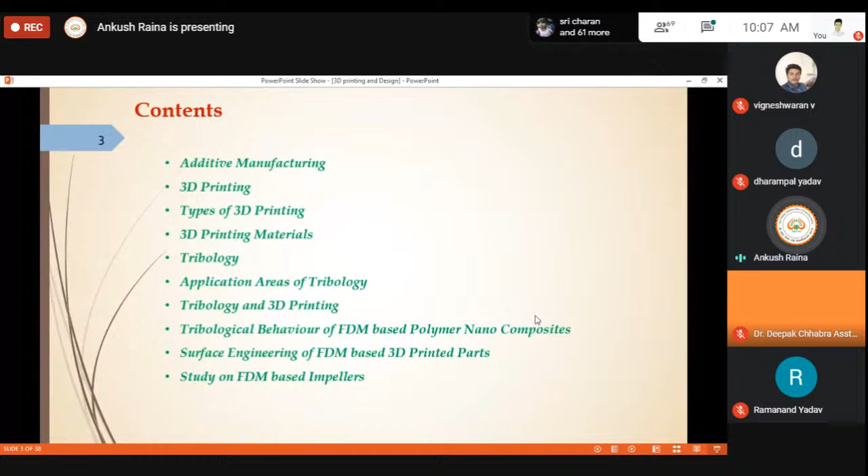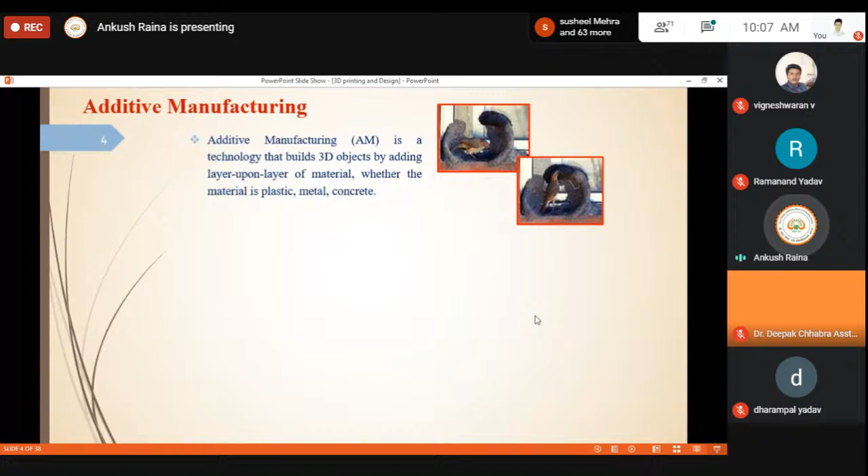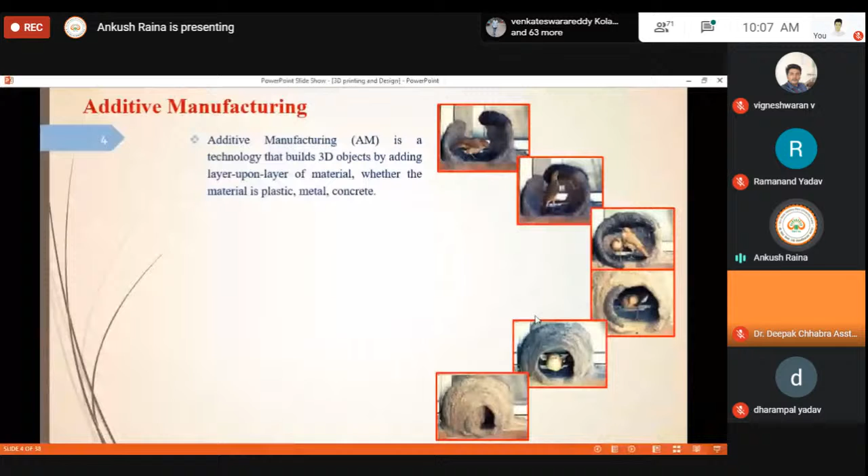So talking about additive manufacturing, nature has given us so many lessons, and from nature we have learned additive manufacturing also. Here from the images you can see how the nest is being built up by the birds, layer by layer. Similarly, another example is the potter wasp, which builds up its nest again layer by layer. So we can say it is additive manufacturing, a technology used to build objects by adding layers, whether plastic, metal, or concrete. You can use different materials with this technology to additively manufacture the components required.

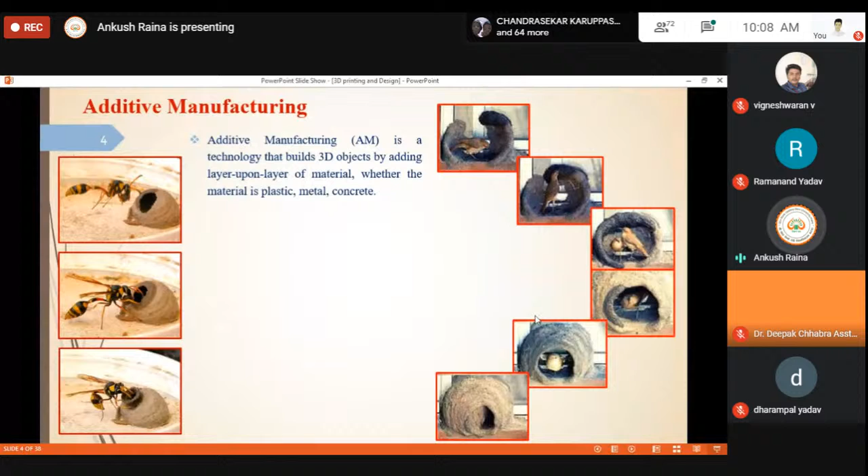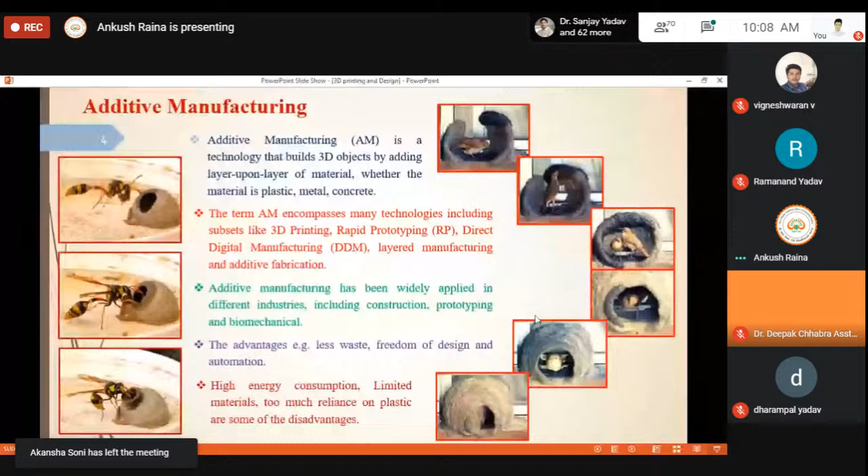So basically, additive manufacturing comprises different aspects such as rapid prototyping, digital manufacturing, layered manufacturing, additive fabrication, and most importantly 3D printing. It has different applications which we'll discuss in the coming slides, some advantages, and certainly some limitations of this technology. So first of all, the difference between additive and subtractive manufacturing is quite basic. Additive manufacturing, or AM, is suitably named to describe the technology used to build 3D objects by adding materials layer by layer.

The term additive basically is used to denote over here that we are using a method of adding and building up the product repeatedly. So, in comparison to additive manufacturing, if we talk about

subtractive manufacturing, it is an opposite method of additive manufacturing. It manufactures the objects basically by subtracting, by using different machining operations. It can be milling, it can be drilling, or it can be any other cutting operation. It is also called traditional manufacturing, which basically we are aware of, and is used by means of

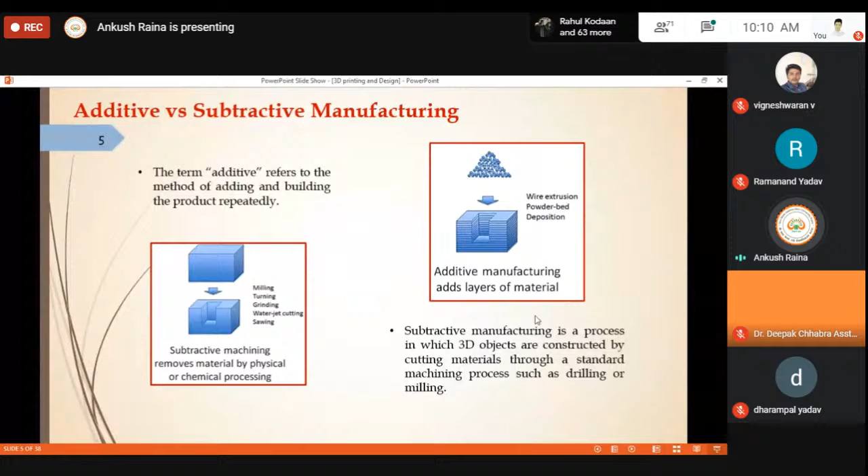your CNC machining. So additive manufacturing is to add something, and subtractive manufacturing is to subtract material from the already manufactured component. So why is it important to discuss additive manufacturing, why does this method have advantages over subtractive manufacturing? The first figure here you can see is that we can manufacture materials with different properties.

So you can see that the topmost layer of this image is 90% ceramic and 10% bond coat, and certainly you can functionalize the material as per your choice by using different coatings and different layers of different materials. So we can generate some functional materials as per our requirement. You can see the bone over here.

You might be aware that the strength of the bone at the central part is more in comparison to the joints, whereas at the joints the porosity is more. So if you want to replicate some sort of bone-like structure, the material should be selected, designed, or manufactured in such a way that it gives similar properties as the human bone or any other bone gives. So additive manufacturing basically helps us to design or fabricate such kinds of structures.

So the most important aspect is part complexity. We can produce parts with a complex nature, which are not easily possible with the other or conventional methods. Secondly, speed is also an important aspect of additive manufacturing. Also, we have the choice of material selection. We can select the materials based upon the applications, but there are limitations that we will be discussing regarding material selection in the coming slides.

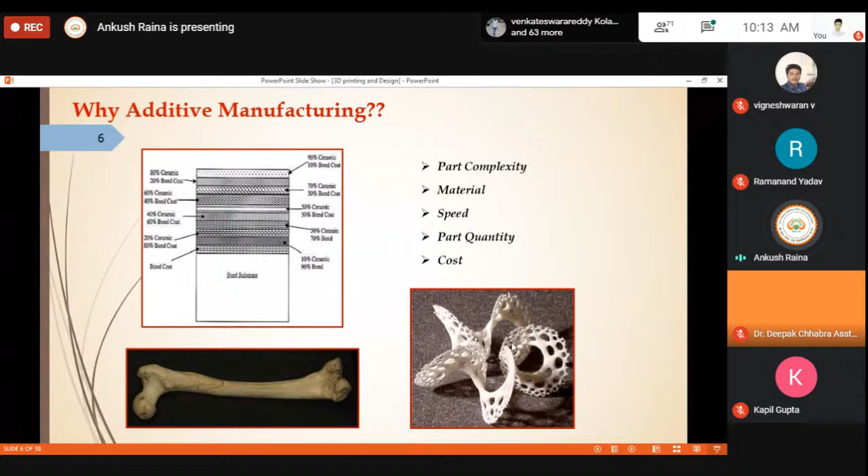So talking about 3D printing, the basic definition. Despite 3D printing being nearly synonymous with rapid prototyping, there are scenarios where it's a viable production process. Typically, 3D printing is used in different sectors, which include transportation, healthcare, military, and education.

And these applications basically involve low volumes and complex geometries, as discussed in the previous slide, that we can produce geometries which are complex in nature very easily in comparison to other conventional processes. Often the most important applications nowadays are aerospace and medical applications, and there is a wide variety of applications in the aerospace industry and in medicine.

And the materials used in 3D printing include resins, plastics, and in some cases metals also. So here you can also see that in 3D printing, 25% of the contribution is for prototyping, 16% is for product development, 11% is for innovation and design, 9% is for reduction of cost, and 10% is increasing the overall efficiency of your systems.

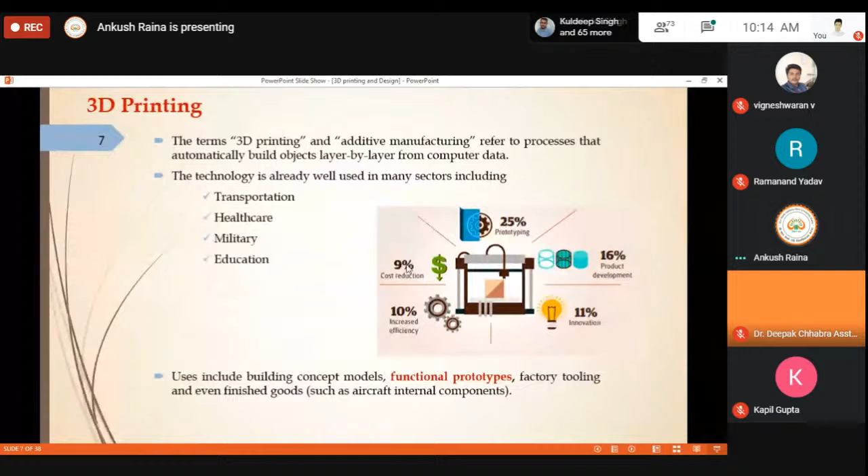So again, it is used to build concept models, functional prototypes, factory tooling, and even finished goods. So before we move ahead, it is important to understand what a prototype is. So we have different types of prototypes which are basically used.

The first one is a design prototype. Secondly, we have a geometric prototype, then functional prototype, then technical prototype, and industrial prototyping. So talking about the design prototype, I'll quickly go through that.

This type of a prototype is constructed to test whether the realized object meets the optical requirements or fits to the overall concept, whether there is any clearance, or whether there is any other tolerance. So we basically use this design prototype to find out that. So basically these models have no functionality and can only be manufactured of standard plastics. So these are just used to meet the design requirements.

Then geometrical prototype is the one which has the exact dimensions of the application and can be installed to see whether other modifications are required or not, whether a change in the dimensions of your prototype is required or not. So this is basically a geometric prototype.

Then coming towards the functional prototype, which is an important prototype, it basically maps the functionalities of the planned component and can be tested directly in the application. So for these, it is always recommended that a small series of sample parts be manufactured, so that they can be tested under various conditions. So basically, this functional prototype is the main or the backbone of all these prototypes.

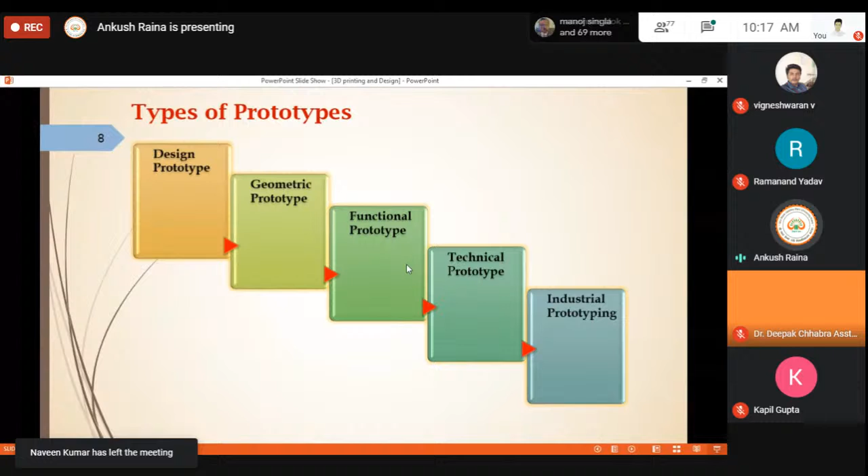So these are the different types of prototypes which are important when we talk about 3D printing technology. So these are basically the 3D printing techniques. Again, this is a basic part which might have already been covered, so I will quickly go through all these points. So these are the different 3D printing techniques which we use, right from stereolithography to electron beam melting. So I'll quickly talk about all these.

Stereolithography is an original industrial 3D printing process, also denoted by SLA. SLA printers produce parts with a high level of detail, smooth surface finish, and exact tolerances. It's widely used in the medical industry, and common applications include anatomical models and microfluidics.

Then coming towards selective laser sintering, SLS. In this, nylon based powders are melted into solid plastics, and since the SLS parts are made from thermoplastic materials, they are durable, suitable for functional testing, and can support living hinges and snap fits. So in comparison to the previous process, the parts are stronger and have rougher surface finishes.

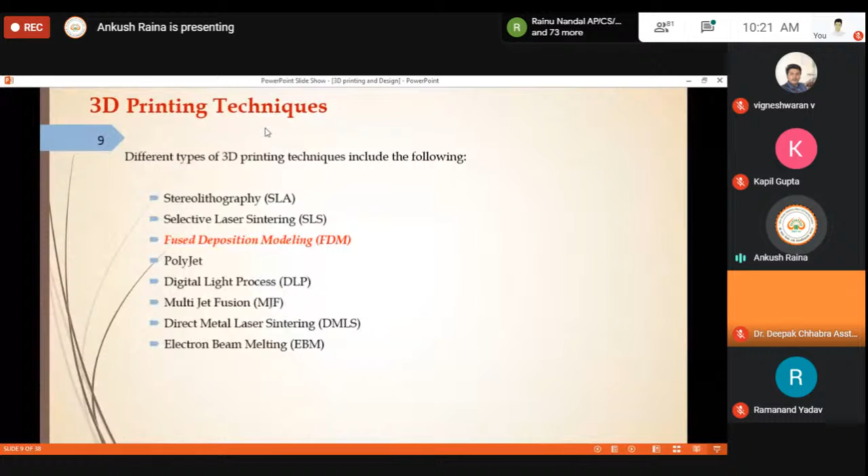These are basic techniques. So coming towards the FDM, because a lot of work has been done by using this technology and this technique, and we have also performed the studies using this technology only, FDM technology. So in that case, a continuous filament of thermoplastic polymer is used to 3D print the layers of the materials. The filament basically is heated at the nozzle to reach a semi-liquid state, and then extruded on the platform or on the top of the previously printed layer.

So the thermoplasticity of this polymer filament is the important property in this method, which allows the filaments to fuse together, because a fusion of the filaments is an important aspect, because it governs the various properties and the various characteristics of the finished product.

The layer thickness, the width, and the orientation of the filaments, and the air gaps basically are the main processing parameters, as I told you, because these will affect the different properties of the 3D printed parts. So the low cost and high speed and simplicity of the process are the main benefits. That's why the FDM is widely used in printing polymer parts.

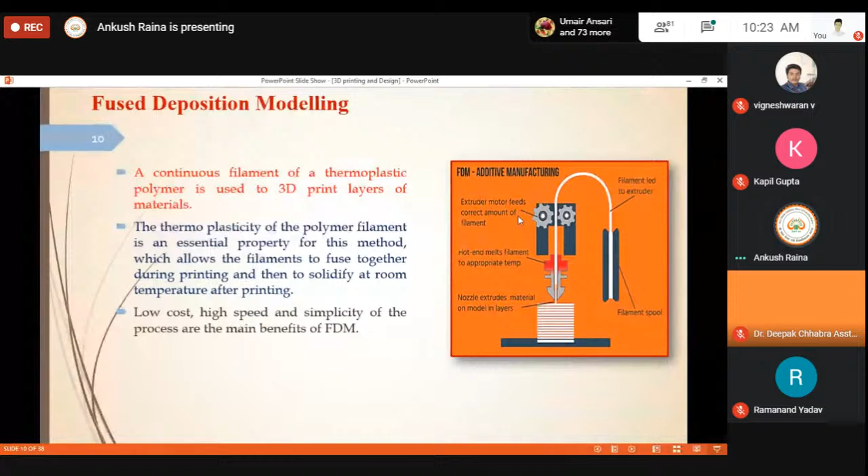But these are the wide variety of materials which are being used. But I can say that there is a lot of work which is further required to be done in order to explore all these properties and all these functionalities of all these materials.

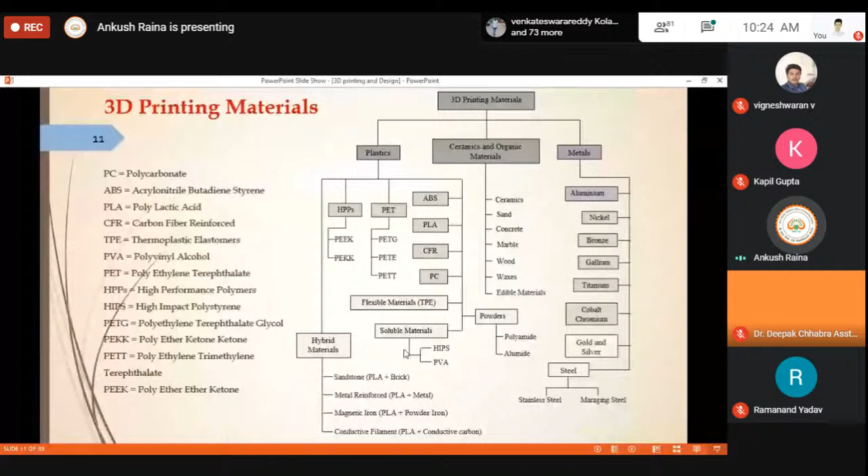So coming towards the challenges and shortcomings of this technology. Challenges: the most important is your fiber orientation, because fiber orientation plays an important role in governing the properties of these different materials, which is the final product. So there is a challenge to find out what kind of fiber orientation will give us the best results. So again, it is a challenge, but a challenge can always be met if you look into that from different perspectives.

And then if you come towards the next challenge, that is your bonding between the fiber and the matrix. As I told you, the temperature plays an important role. If the bonding between the fiber and the matrix is good, certainly the properties of the finished product will be good. So again, it is a challenge to produce a finished product with good bonding. Then void formation, again, it is there, which is again a challenge.

Then cost of the system equipment, because you know that we have different 3D printing technologies, and we have different techniques for this 3D printing. So each and every technique has its constraints. So it's again a challenge to look into the cost of the equipment which is being used to print these parts.

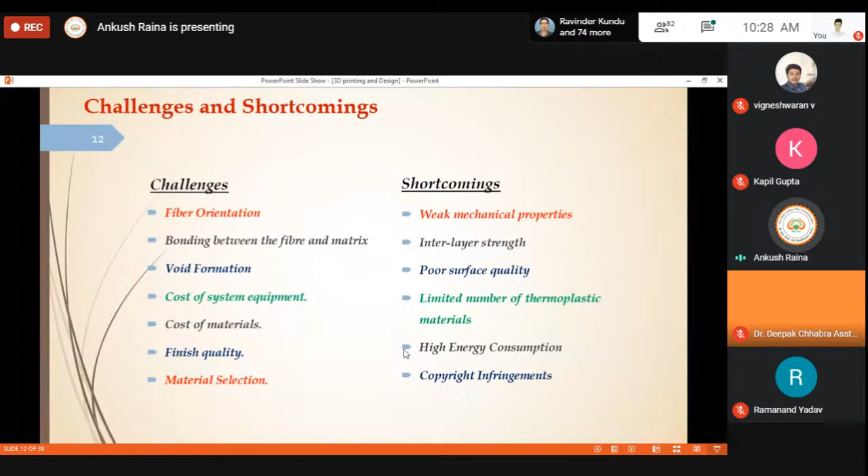So the considerations, when we go for 3D printing or when we go for the conventional processes of material fabrication. The basic factors which should be considered while selecting the 3D printing process are the budget requirements.

This is your functional requirement, cosmetic appearance; obviously the shape or the aesthetic looks of the material should be met. Then geometry is an important aspect, and again material selection, which is an important aspect, because material selection plays an important role regarding the applicability of your products.

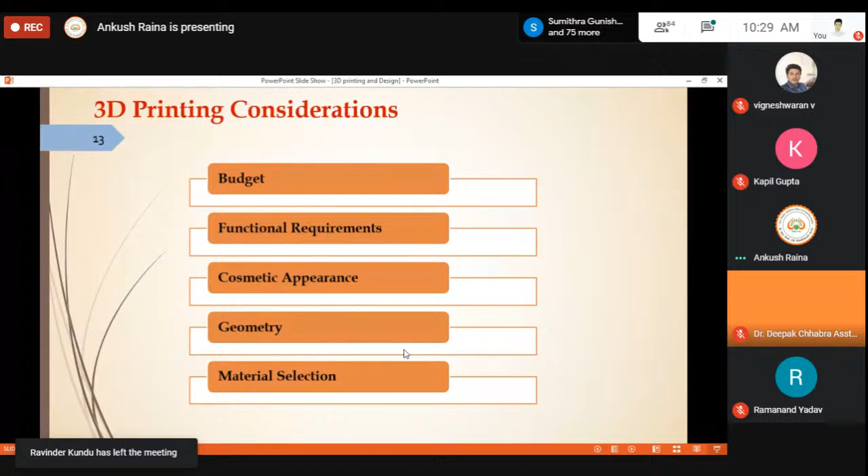So coming towards the next slide. These were the basics regarding 3D printing, which you are aware of, and which might have been discussed in the previous talk by Dr. Abid Ali. But this is tribology, which is something new in this course.

So tribology was first reported by Peter Jost. It is a science concerned with friction, wear, and lubrication mechanisms. Since you are all from the mechanical background, you might be aware of this term tribology. The performance, reliability, and efficiency of the system basically depend upon the friction and wear characteristics of a particular component.

So the widespread involvement of wear and friction: you know that friction is everywhere, and in order to overcome the friction, there is always a wastage of energy, and material wastage is always there. So friction and wear are an important aspect when you talk about tribology. Whenever you talk about the motion of components or sliding surfaces, the goal of the tribologists is always to reduce those energy losses by bringing improvements in different aspects.

There are reports which have projected that if we use best tribological practices, we can save the GDP or GNP, gross national product, of an industrialized nation by 1 to 1.4%. That will contribute to the economy and give a boost to the economy. But the use of the best tribological practices is required.

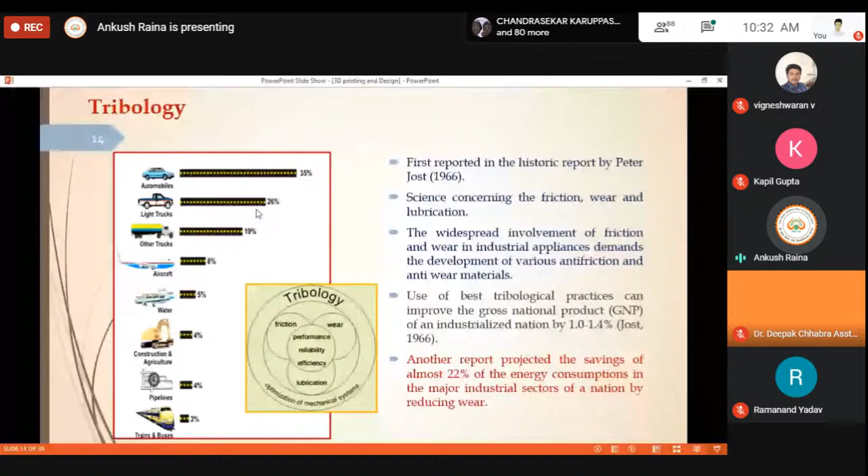If we look into the performance of the components which are used in automobiles, light trucks, and other trucks from the tribological point of view, surely we can reduce the energy waste, or improve the savings, and certainly it will help to improve the economy of a particular nation. So tribology deals with friction, wear, and lubrication in order to improve the performance, reliability, and efficiency of mechanical components. So there are different application areas of tribology.

So first, when tribology was introduced: although friction is a term which has been used for ages, the concept and the term of tribology was coined in 1966, which encompasses friction, wear, and lubrication. So when it was started, this term was coined.

Peter Jost was talking about industrial tribology only, because most of the frictional and wear losses are due to the industries, different mechanical components, different machines. So industrial tribology was, first of all, coined in 1966. But with the passage of time, ocean tribology was coined. Then manufacturing tribology was segregated therefrom.

Then we came to know about the important aspect, that is biotribology, because in biological systems there is also some tribology, some friction, wear, and lubrication mechanisms. Ocean tribology involves the investigation of friction and wear in a seawater environment. Seawater is very corrosive in nature, and it results in an increase in the surface roughness.

And if the surface roughness is increasing, when the components slide there will be a lot of wear and a lot of friction. Because if the surface is rough in comparison to a smooth surface, your energy requirements will be more, whether in sliding or rolling applications. So in ocean tribology, the corrosive nature of the seawater tries to increase the surface roughness.

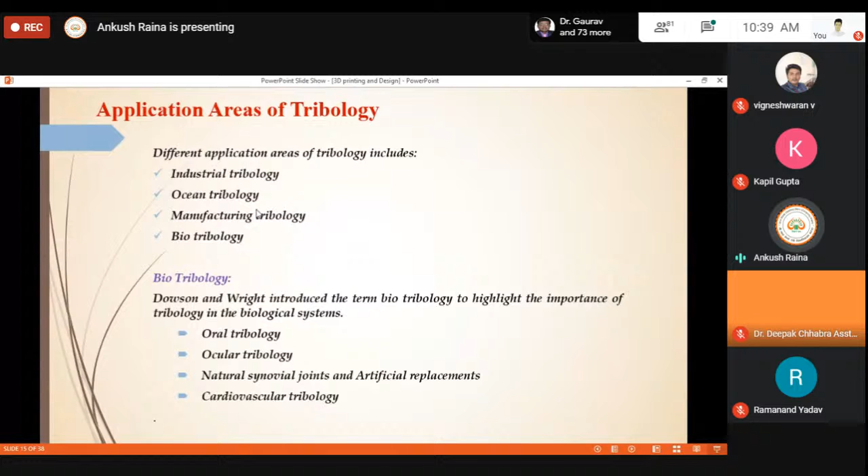Coming to the types of wear, I will quickly go through these aspects. First is adhesive wear. Adhesive wear is when two material surfaces or metal surfaces are in contact or in sliding contact, the metal of the softer surface will be transferred to the other material, and this is due to the mutual affinity between the materials. It will be more when the loads are high and the temperatures and pressures are high, because there will be asperity to asperity contact.

What we call an asperity: if we consider a surface profile, you will see there are peaks and there are valleys. The peaks are called asperities. Those peaks will come in contact with the other surface, they will be damaged and transferred to the other material. So that is called adhesive wear.

Similarly, we have abrasive wear. Abrasive wear is somewhat different from adhesive wear. In case of abrasive wear, there will always be abrasion or a cutting action. What happens is that the hard particle rolls under the pressure and tries to scratch the surface away. I'll show some images about this adhesive and abrasive wear. So basically, abrasive wear is different from adhesive wear.

Then coming to corrosive wear, it will be due to the chemical reaction between the material and the corroding medium, which can be either a chemical reagent or a reactive lubricant. As I told you, it is generally predominant in marine environments, where a corrosive environment is there. Then comes erosive wear. What is erosion? From that, the term erosive wear has been coined.

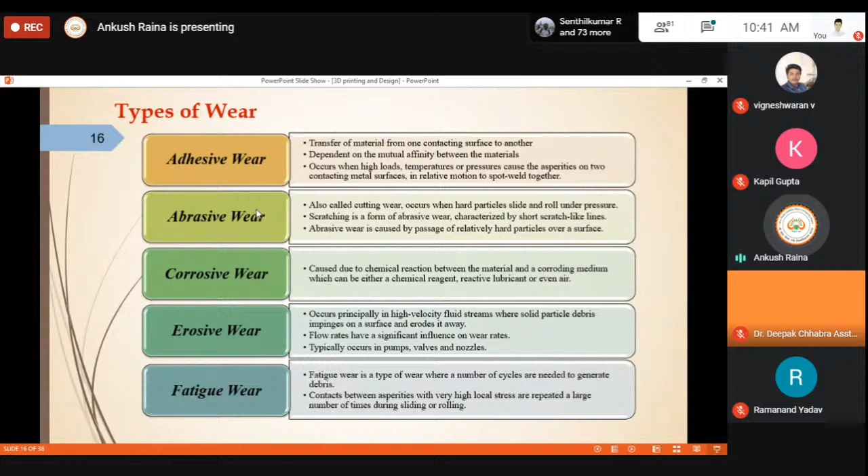Fatigue wear is a type of wear where a number of cycles are needed to generate the debris. Contact between the asperities with very high local stress is repeated, due to which wear occurs between the different components due to sliding or rolling. So these are basically the different types of wear we have. Now, if we have friction and wear, what will be done to reduce that?

How can that be reduced? Certainly, lubrication is one of the oldest methods to reduce friction and wear. The basic function of a lubricant is that it separates the contacting surfaces. When there is no contact between the surfaces, there will be minimum friction and minimum wear.

So the function of a lubricant is to lubricate, or to reduce the friction. That's the prime function. Secondly, it helps in cooling, it helps in cleaning, it helps in reducing noise, it helps in protection, and it helps in reducing wear. So if we talk about friction, the function of a lubricant is to reduce the friction.

If we talk about friction, what are the effects of friction? Why are we reducing this friction? Because friction causes metal to metal contact, and if there is metal to metal contact, there will be wear and high friction, due to which there will be high energy requirements. Secondly, friction causes wear and tear. Thirdly, it has the capability to generate heat.

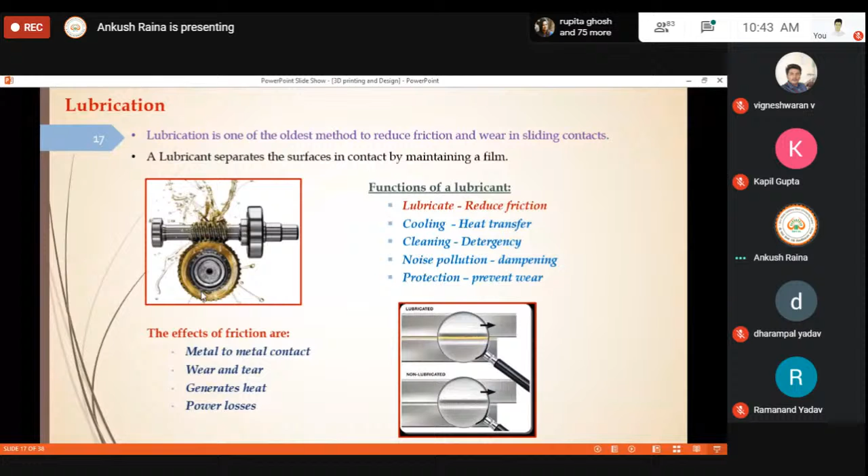You know that due to friction, heat will be generated, and when heat is generated, it goes into the environment and adds to the energy losses. Then certainly, if you have friction, if you have resistance, more power will be required in sliding or in rolling. So certainly there will be more power loss.

So nowadays we talk about nanotechnology, and nanomaterials are being used to improve the lubrication characteristics, the friction characteristics, and the wear characteristics. There are different influencing parameters in nanotechnology which govern the overall functioning of tribological components, the tribological properties. So what are those factors?

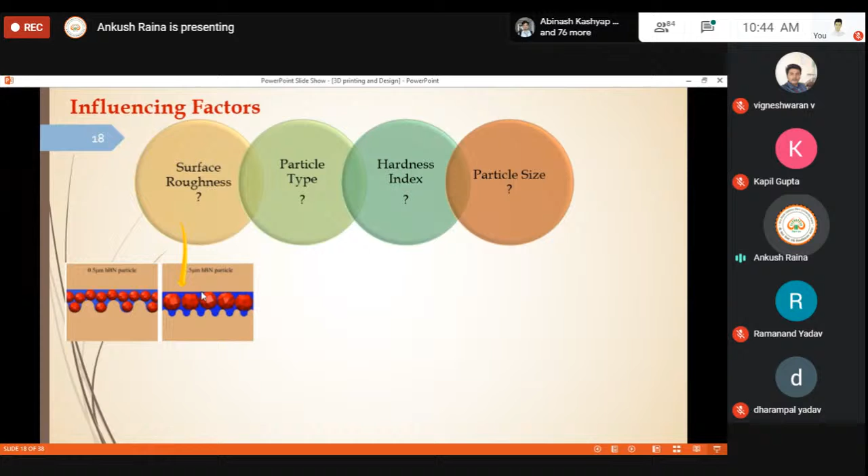Surface roughness. Surface roughness is an important aspect. You can see here the different nanoparticles being used. In the first image, the surface roughness is higher, and in the second image the surface roughness is lower, although it also has a relation with the particles. If the surface is smooth, there will be less friction. But in the first image, the particles are embedding in the surface, and that also plays an important role in governing the friction and wear properties.

Secondly, the type of particle: whether the nanoparticle we have used is hard or soft in nature. If it is hard, it will not deform; it will have a rolling action. But if it is a softer particle, it will try to deform. We have different soft materials like hBN, hexagonal boron nitride, WS2, tungsten disulfide, and molybdenum disulfide. These are soft materials, and they form a layer by layer structure. So the type of particle will also govern the overall behavior of these sliding components.

Then the hardness index plays an important role. Hardness index means the ratio of the hardness of the material to that of the surface. In these two figures, the hardness of both materials is the same, but it is less in comparison to the particle. So the hard particle is embedded in both surfaces. On the other hand, here the topmost surface is harder and this one is softer, so the particle is not embedding in the topmost surface; it is embedding in the lowermost surface only.

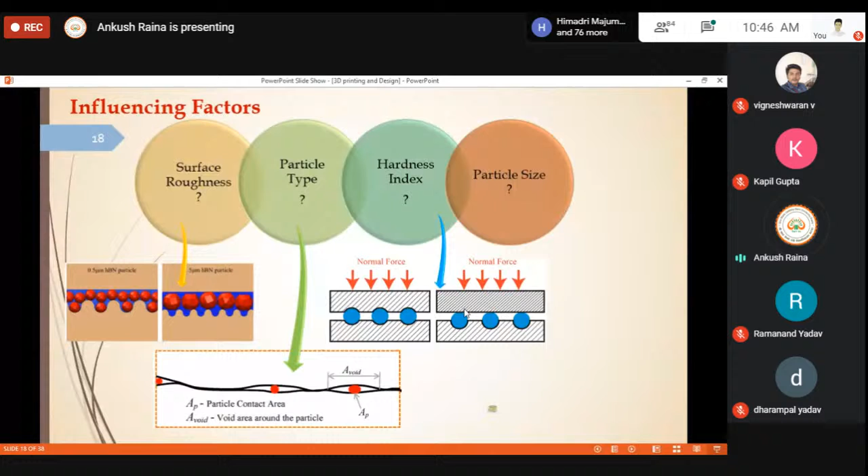So basically, the hardness index is an important aspect: whether the material is soft or hard, and what kind of nanoparticle we are using, that is also an influencing factor.

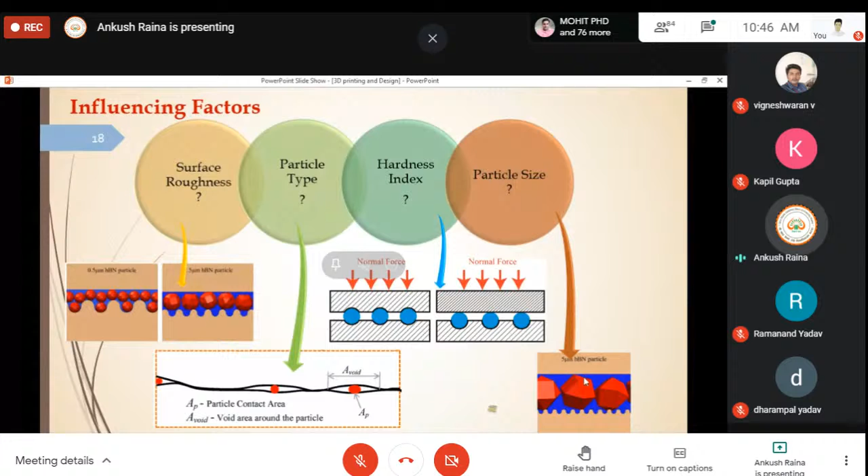Then comes the particle size. Obviously, particle size and surface roughness have a correlation. With more surface roughness, a larger particle size can be accommodated. If there is less surface roughness, there should be a smaller particle size. Here you can see that the nanoparticles are large, whereas the surface is much smoother. So these nanoparticles will not embed in the valleys. They will remain on the peaks, and they will try to damage those peaks.

So it will not give us the best properties. But if we take into consideration this one, the size of the nanoparticle is in the range of your surface roughness, certainly it will give you the good properties. So the relation of surface roughness and the particle size plays an important role in governing the friction and wear characteristics of the sliding as well as the rolling components.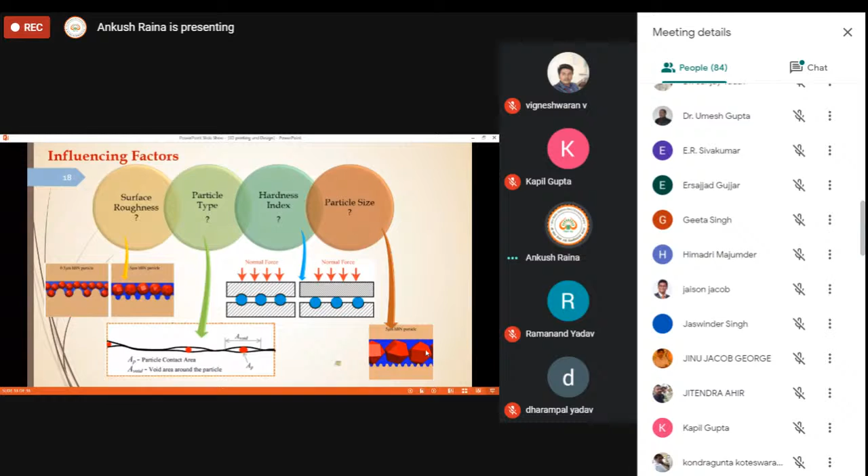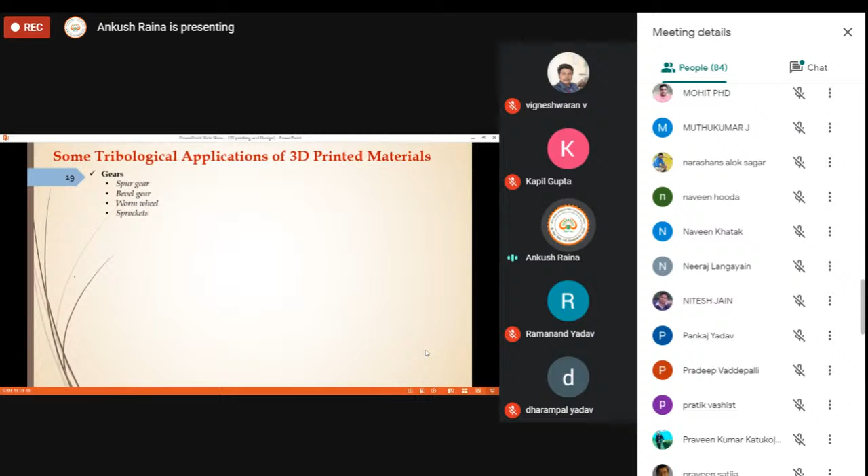So coming towards the connection between the tribological applications and 3D printed materials, where these 3D printed materials are used from the tribological point of view, where there are the sliding contacts. The first example is the gears. First one is your spur gear, then bevel gear, worm wheels, sprockets. So you have the figure over here. A gear which is made of some polymeric material is being used.

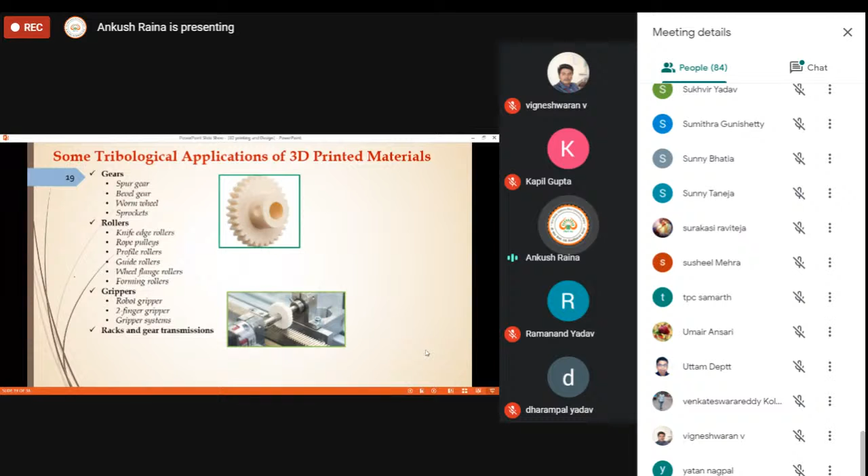Then we have the rollers. Knife edge roller is there, rope pulleys, guide rollers, wheel flange rollers. So grippers are also there, basically used for gripping action, because if you want to grip something, you need to have some friction in between that. If the friction will not be there, then the gripping action will not be possible. Then rack and gear transmission, you can see the image over here. There also 3D printed materials are being used.

Then plain bearings, you can see these are being used in the industries. These are the tried and tested applications from the tribological point of view of the 3D printed materials. This is another type of a bearing. Then threads and the lead screw nuts. You can see here also the 3D printed materials are being used. Then sliding plates. Then the two component parts. So basically, these are the industrial tribological applications of 3D printed materials.

Although there are some biological applications also, as I told you, in dentures, in natural and artificial joints, you can see that. But that aspect, I think I have seen the schedule. That aspect will be covered by the coming speakers, which will be on the day 2 or day 3. So that aspect of bio applications will be covered by the coming speakers.

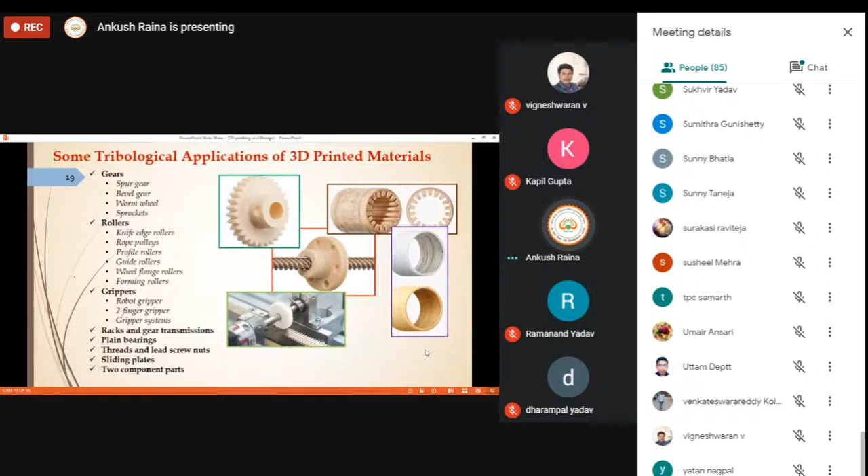So coming towards the two component parts, what is this? A two component part combines the advantages of two different materials in a single part. Because other 3D printing materials are usually optimized for strength and rigidity without considering the tribological applications. But if you have to take into consideration the tribological application, which means the wear and frictional behavior, two component 3D printing is an important aspect.

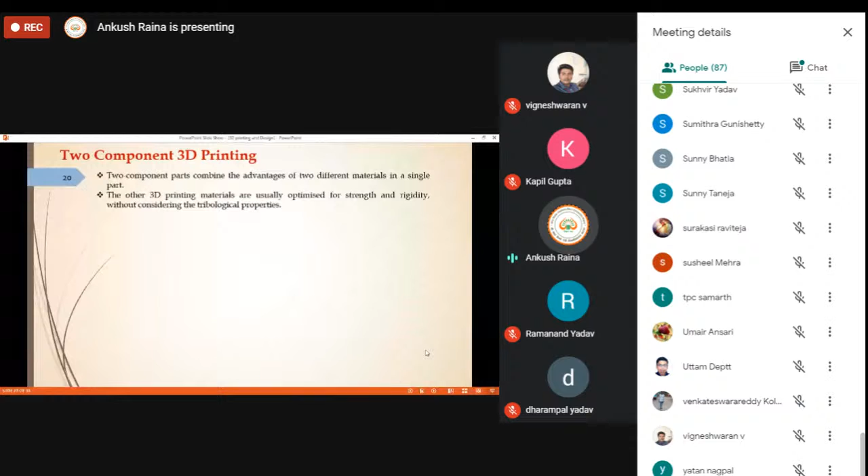So two component 3D printing allows the tribo filament to be combined with other materials within a component, so that we can enhance the mechanical properties without sacrificing your wear as well as your tribological properties. So the common example we have is bell crank. You can see that we have used the two materials over here. Then we have the grippers. So you can see this black material is there, which is designed in such a way which will give the strength to this component, whereas this white material is used to give the better tribological properties.

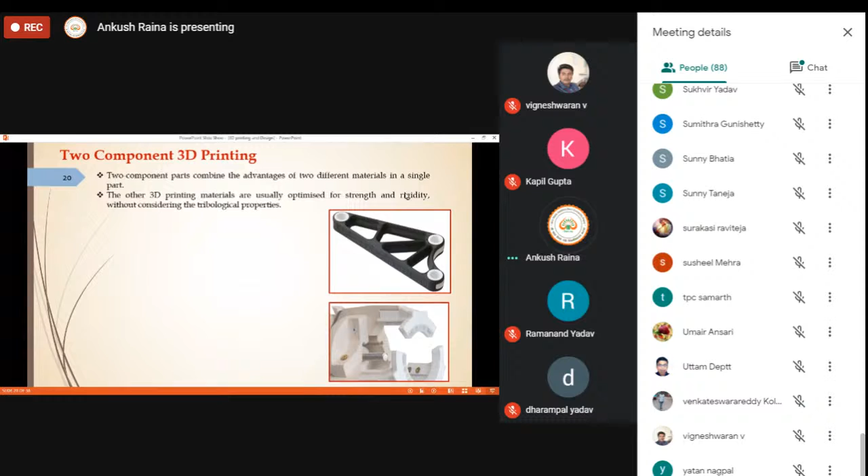So basically what a bell crank is, it's a component for deflecting forces. It's greatly rigid. Rigidity protects the joint from interfering influences. That's why it is being used. The bearing points, shown in the white color, are smooth running, durable, and wear resistant. Because if the wear resistance is more, then the life of the component from the tribological point of view will be more. So basically, a good combination is obtained by using carbon reinforced PET material, which has been proved to be the optimized tribological material, which is being used to produce the bell cranks.

Secondly, we have the grippers. This one is a gripper. You know that the body of the gripper should have different properties, whereas the gripping points should have different properties, so that they are able to grip the particular object properly. So the gripper's body is manufactured with a fiber reinforced filament generally, and a flexible filament whose high coefficient of friction ensures a secure grip. You know that if you want to grip something, there should be more friction, and if there is less friction, what will happen? You will not be able to grip.

So the gripper body has a rigidity in order to take the load of that body, and these gripping points have the maximum friction in order to grip the particular object. So these are basically the two typical examples of two-component 3D printing. And basically two-component 3D printing, as I told you, is designed or is basically suited for tribological applications.

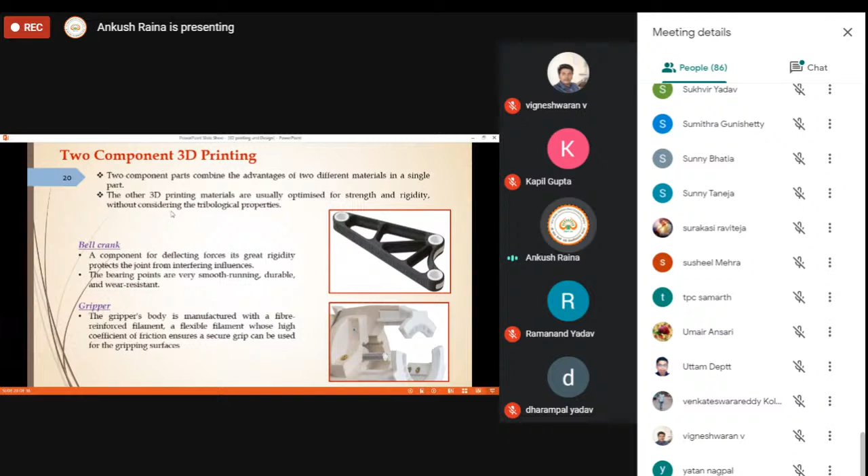Now, what are the future prospects of tribology? Before coming towards the original work, let me talk about what are the future prospects of tribology and 3D printing, wherein there will be some tribological aspects where these applications will be used. So we can talk about 3D printing coatings. Coatings are used for what? Coatings are used to improve the surface properties.

So if we want to improve the surface properties, coating through 3D printing technology is possible or is a viable option, but that needs to be explored. Then coming towards 3D printing composites, I can tell you that composites are being used, but as far as today's concerned, there's a lot of scope of improvement in 3D printed components. So we can also work in that aspect. We can look for 3D printing composites.

Then 3D printed texturing. Texturing basically is to provide some patterns on the surfaces. And texturing plays an important role in governing the overall coefficient of friction. See, when we talk about friction, you know that friction is directly proportional to the load applied, but that is on a macro scale. But if you're talking about a nanoscale or a small scale, that is not true. In that case, it is not the whole area of contact. There is a difference between the apparent area of contact and the real area of contact.

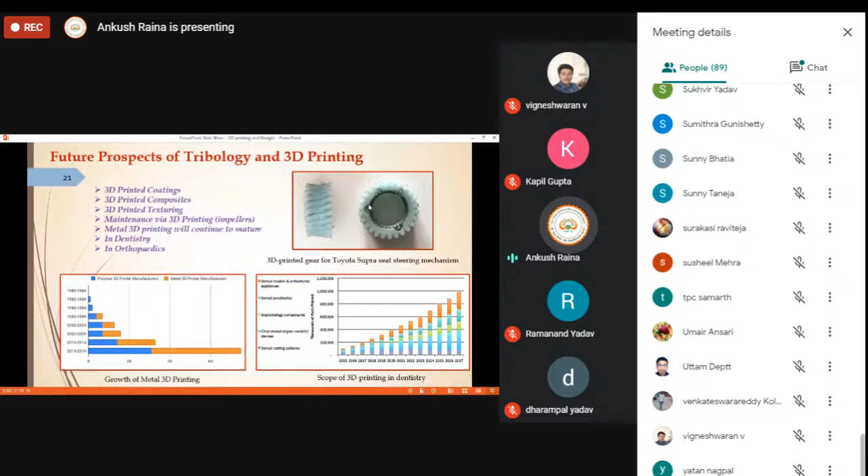So these are basically the future prospects of tribology as well as 3D printing. Now coming towards the work which we have done, first we have studied the tribological behavior of FDM-based polymer nanocomposites. We have used the PETG material and reinforced it with carbon fiber, because carbon fiber has different characteristics. It tries to improve the frictional properties and also the mechanical properties. So we have used PETG with carbon fiber reinforcement.

We have carried out the mechanical testing, then tribological testing, then analysis, and conclusions have been drawn from the study. Basically, how has this carbon fiber reinforced PETG been obtained? We have the carbon fiber pellets and PETG pellets, and a twin screw extruder has been used to produce this CF PETG.

So what were the objectives? To fabricate the carbon fiber reinforced PETG, to study the effect of carbon fiber and different parameters on the frictional characteristics, and then to carry out the surface analysis of the worn out samples. For testing conditions, we used different layer thicknesses, different loads, sliding speeds, wear track diameters, and the sliding distance was kept at 1500 meters.

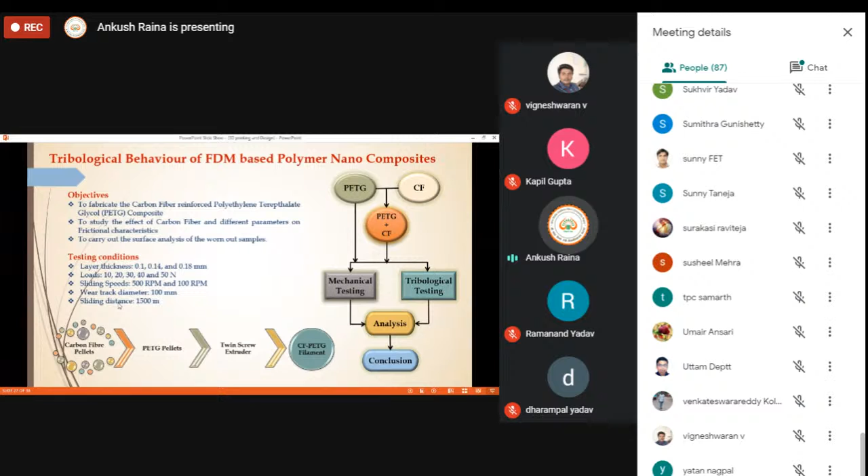So these were the coefficient of friction graphs obtained for PETG under low speeds, 100 RPM, and at different loads for PETG and carbon reinforced PETG, for different layer thicknesses, and then for high speeds also. So if you talk about the coefficient of friction, the addition of the carbon fiber reinforcement has an overall effect on the coefficient of friction, which is reduced. If you compare this carbon reinforced PETG, the coefficient of friction is mostly less in comparison to this one.

This is basically due to the intrinsic nature of carbon; as I told you, it acts as a self-lubricating material. The carbon reinforcement adds strength to the polymer matrix, so the real area of contact with the counter body under load is reduced. As I told you about the apparent area of contact and the real area of contact, the real area of contact has an important role to play in tribological applications. So due to the reduction in this true contact area, the layer thickness did not affect the coefficient of friction at different loads for carbon reinforced PETG.

Also, the film formation capability, which I will show you in the SEM analysis in the coming slides, further aided in reduction of the coefficient of friction even at these high speeds. If you talk about the effect of load, you can see an increase in the coefficient of friction with the increase in load. If you see over here, there is an increase, and here also a slight increase. This is as per the basic laws of friction: with the increase in load, there will always be an increase in the coefficient of friction.

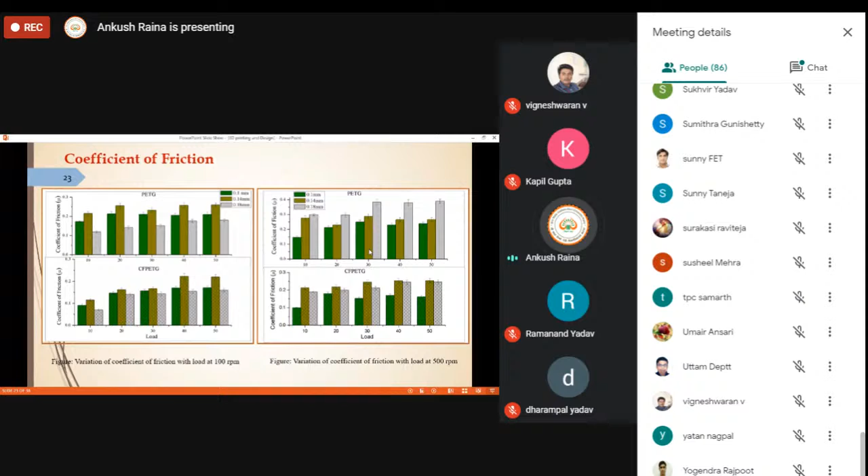So coming towards the frictional characteristics, how the friction is behaving, you can see that the friction behavior has been shown for PETG and CF PETG at 100 RPM and 30 Newton load. So you can see that for PETG, which is not reinforced with the carbon fiber, there is an increase in the coefficient of friction with the increase in the number of cycles. At the start the coefficient of friction was less, but it is increasing, and there is a sharp peak which can also be observed for a particular layer thickness.

But in comparison to this figure here, you can see that the coefficient of friction is quite stable and it is decreasing. Here the coefficient of friction has not crossed 0.2, but here the coefficient of friction has crossed 0.2 for these two layer thickness values. So certainly, as I told you, the carbon fiber reinforced PETG has better frictional characteristics in comparison to the PETG which is unreinforced.

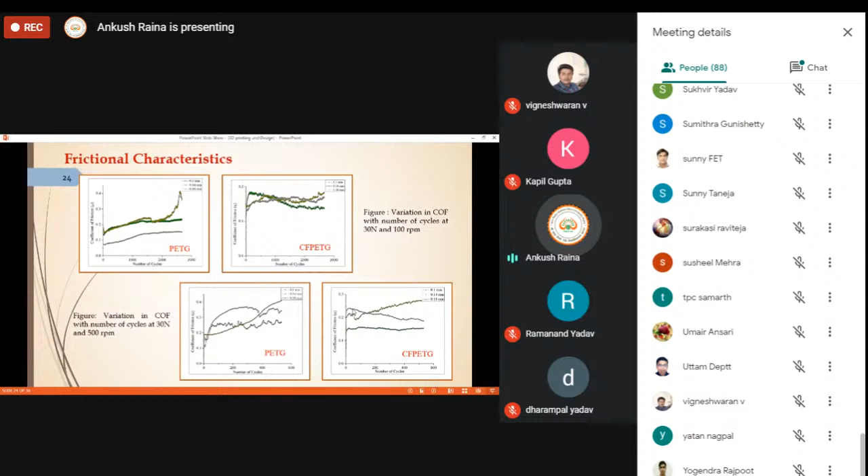So a similar case study has been done at the high speeds. Here you can see again there is an increase, and the coefficient of friction is in the range of 0.2 and 0.3. But here the carbon reinforced PETG has shown less coefficient of friction, and the behavior of these curves is quite good in comparison to this one. The curves over here are staggered, but the curves over here are smooth. And in these two cases, the coefficient of friction is decreasing with the increase in number of cycles, and that should be the requirement of a particular material from the tribological point of view.

So these are the surface analysis which have been obtained after carrying out the SEM analysis. We have obtained these SEM analysis for grid PETG and grid CF PETG. You can see that here the delamination is there. After sliding contact you can see the damaged portion over there. The plastic deformation is also there. The grooves are also there. So there is a lot of damage on the surface in comparison to the surface which is reinforced with carbon fiber. Here the surface is much more smooth. This SEM has been carried out at 200 micrometers.

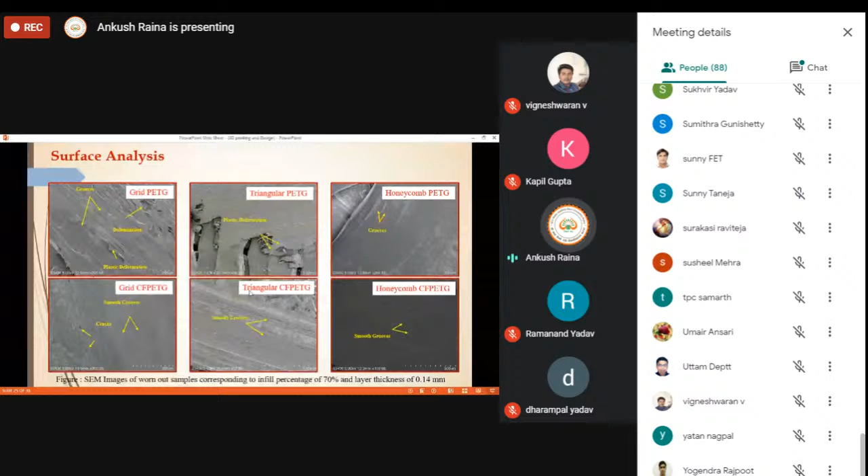If you take into consideration the triangular PETG, here also you can see there is a lot of deformation which has taken place. Whereas with carbon reinforced PETG, the surface is again smooth. A similar observation has also been made with the honeycomb CF PETG. So in short, carbon reinforced PETG has the capability to reduce the frictional characteristics, to reduce the wear characteristics, and ultimately to give the smooth surface finish, which is the requirement of any sliding component from the tribological point of view. So we can use carbon fiber PETG in 3D printing applications where we have sliding contacts and rolling contacts.

So coming towards the conclusion of this particular study: the tests were carried out at different loads and different speeds. What was observed? The carbon fiber increased the strength of the polymer. Mechanical testing has also been carried out, but I have not shown it here because the objective was to show the relation between the tribological characteristics and 3D printing. So only the tribological part has been shown. So carbon fiber increased the strength of the polymer and its intrinsic lubricating nature.

So carbon fiber increased the strength, and also it improved the frictional resistance. The coefficient of friction was reduced by 47% at 100 RPM for a particular layer thickness, that is 0.1 mm, and 44% at 500 RPM for 0.18 mm layer thickness.

So from the analysis which has been shown in the previous slide, it was observed that there was a different wear mechanism. At some places there was some adhesion, at some places there was some abrasion. So the role of CF in smoothing the surfaces is quite visible in the scanning electron microscopic images which have been shown in the previous slide.

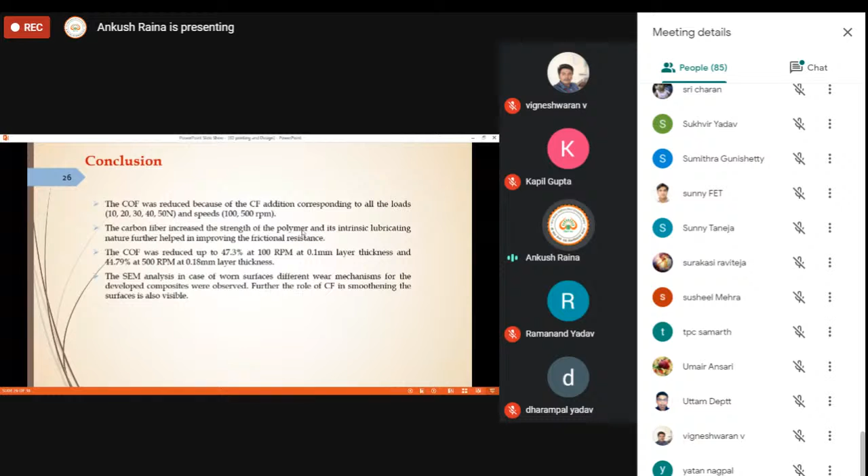So coming towards the next study, which has been carried out by again my group. This is regarding the surface engineering of FDM based 3D printed parts. In that, as I told you, texturing is also playing an important role. So in that case, we have tried to explore the effect of texturing on the friction and wear characteristics, because as I told you, the contact area again plays an important role.

And further, if you're talking about lubrication, these textures have the lubrication retention capability, and due to which there will be less coefficient of friction in comparison to the dry states. So we also tried to explore the lubrication retention capability of these textures in the second part of the study. So what was the objective?

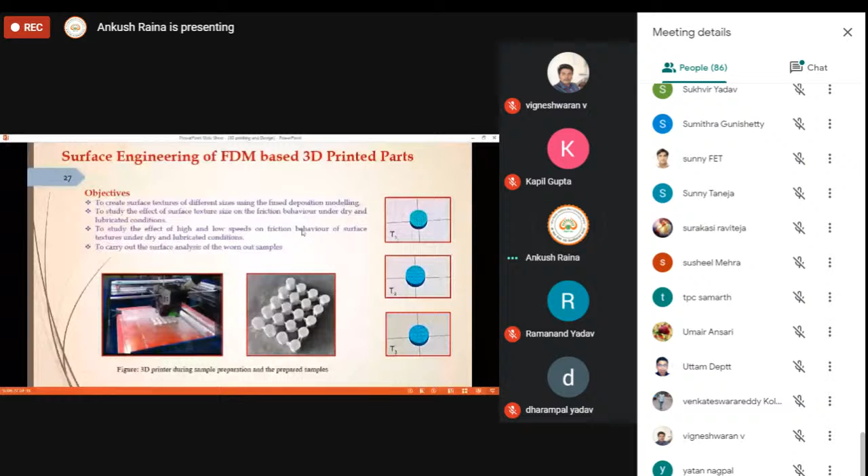We basically produced three types of textures to create textures of different sizes using FDM. Then we studied the effect of surface texture size on the friction behavior under dry and lubricated conditions. Then again, this effect was studied for high speeds and low speeds. And then scanning electron microscopic analysis was carried out. So what was the process?

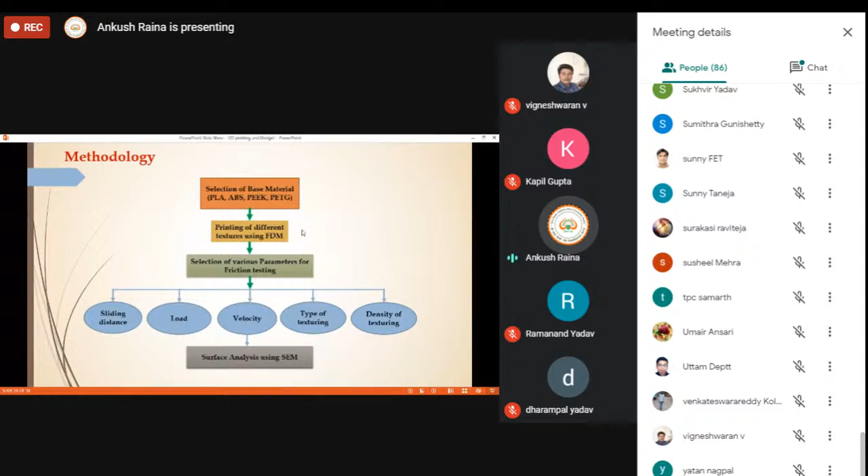Here we have used PLA, not the other materials. So we selected the base material, then printed, then various frictional parameters were selected. The sliding distance is an important parameter, load, velocity, type of texturing is also an important parameter, and density of your texturing, how dense the textures are, that is also an important parameter. So based upon all these five parameters, we carried out the testing, and then the surfaces were analyzed for this purpose.

So the frictional characteristics under dry sliding conditions, and first at the low speeds, you can see we have the pins like this, and this is a zoomed view of the pin which is shown over here, and you can see the textures over here. We generated these textures on those pin surfaces, and we tried to study the frictional characteristics, effect of load on COF, and we tried to carry out the surface analysis.

So this figure is regarding your frictional characteristics. It gives the variation of coefficient of friction with the number of cycles at 30 Newton load and 100 RPM under dry conditions. So for texture T1, you can see here, the coefficient of friction increases linearly up to 1100 cycles. For this time, this one.

So for texture 2, the coefficient of friction is high at the start. This red one texture is there. The red curve is showing that the coefficient of friction is high in comparison to the other textures at the start. But after a few cycles, it decreases. This may be due to more interaction of the asperities at the start.

Certainly, what happens is that at the start, or in the running-in condition, there is interaction of the asperities, and the interaction of asperities basically causes adhesion, and due to adhesion there is more resistance, which leads to an increase in the coefficient of friction. But after some time, when the steady state condition is achieved, the coefficient of friction curve basically tends to stabilize.

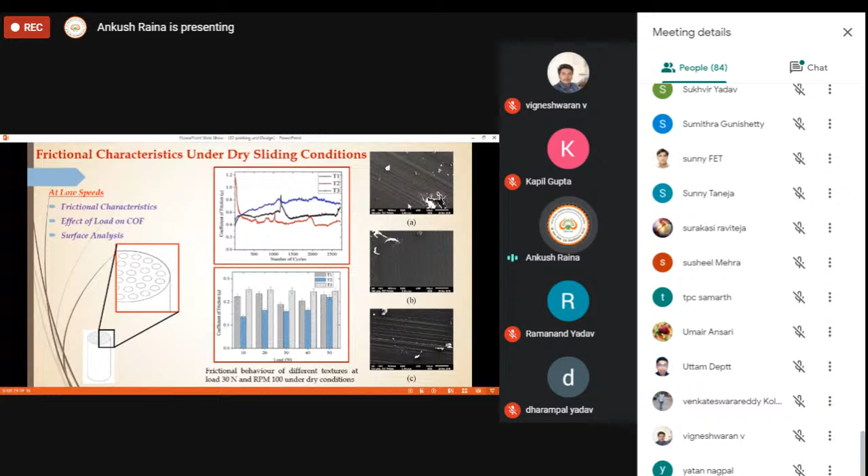So certainly it indicates that there is less resistance, which has been caused due to sliding during the tribological testing. So this texture T2 has resulted in good properties or minimum frictional properties in comparison to the texture T1 and texture T3. Now coming towards the frictional characteristics under dry sliding conditions, but these are at the high speeds.

So the high speed characteristics, if you take into consideration, you can again see the frictional characteristics over here. Texture T1 has shown varied behavior, whereas the texture T2 has also shown some different behavior. At the start, the coefficient of friction is high, but it certainly decreases after steady state, after 200 number of cycles, and tries to stabilize. Whereas for the texture T3, the coefficient of friction increases, and the coefficient of friction is more in comparison to the previous cases. So if you take into consideration all these coefficients of friction at different loads, again texture T2 has proved to be a good texture, which has resulted in the minimum coefficient of friction.

But the surface damage is comparatively different from the previous case. This is basically due to the high speeds. More speed will be there, more heating will be there, and due to more heating there will be more adhesion. And what will happen if the adhesion is there? The adhesive wear will be more, and the surfaces will be damaged more in comparison to the previous cases, as you can see from these previous figures.

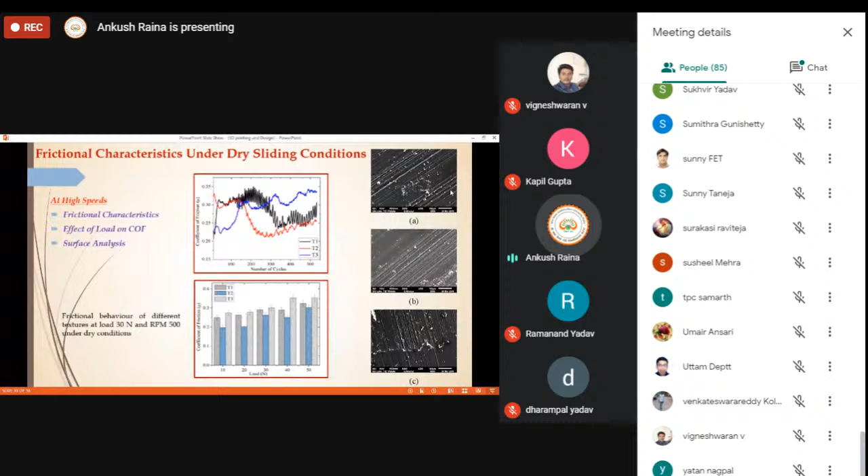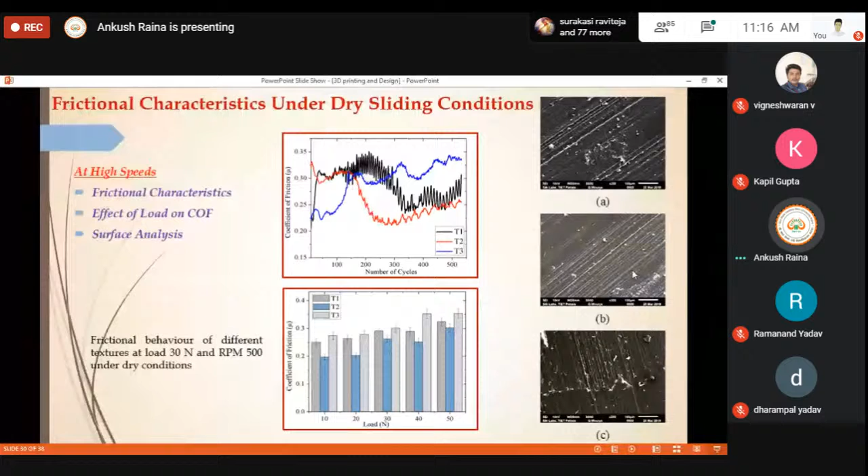But if you compare all these figures, you can see the surface damage with the texture T2 is comparatively less in comparison to the texture T1 and T3. In texture T1 and T3, you can see there is a lot of plastic deformation, and the material removal in this case is much more in comparison to the texture T2. Then under lubricated conditions, the testing was also carried out, but the principle and the behavior is different for the lubricated conditions.

In that case, we have used an oil, and you can see the curves are much more smooth in comparison to the previous dry cases. This is for low speeds, 100 rpm. These results are for high speeds. You can see that the curves are stable, and the coefficient of friction decreases with the increase in the number of cycles. And here you can see that the texture T3 has given us a minimum coefficient of friction.

Certainly, that is quite logical, because if you take into consideration the texture size of the T3 is more, and if the size of the texture is more, they have more oil retention capability. And if the oil will be more during the sliding operation, certainly the friction will be less. So which is quite justifiable in case of low speeds, which is 100 rpm, very low speed. So that's why the T3 texture has shown minimum coefficient of friction in comparison to the other textures T1 and T2.

Whereas if you talk about the high speeds, the reverse case is the texture T1 has shown less coefficient of friction in comparison to the texture T3. The reason here again is quite logical, because if you increase the speed of testing, 100 rpm was the low speed and 500 rpm was the high speed. So in that case, what will happen? The oil will not be retained. Basically, we are talking about the lubricant retention capability. If the speed is less, the lubricant will be retained.

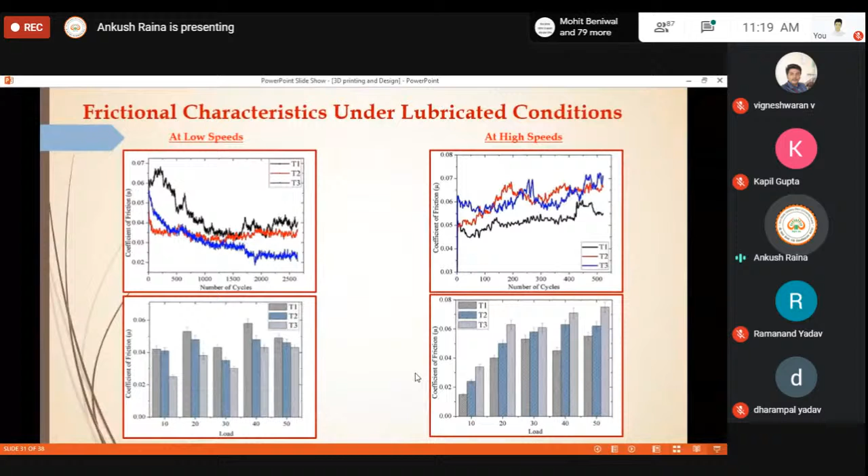So here the lubrication retention capability of the texture T1 is more, but here the lubrication retention capability of the T3 is more. So we can select the texture depending upon the type of requirements for which we are using these materials, and we can optimize or customize the parameters or the properties as per our requirements.

So if you take into consideration the comparison at the high speeds and the low speeds for dry condition testing, and for high speed and low speed, dry versus wet, LT1 means lubricated texture T1 with respect to dry texture T1. So here in all the cases you will see that the lubricated texture has improved the coefficient of friction nearly by 80 to 90%. Lubricated texture T3 with respect to dry texture T3, this one is the curve. So this has improved the coefficient of friction nearly by 80 to 90%.

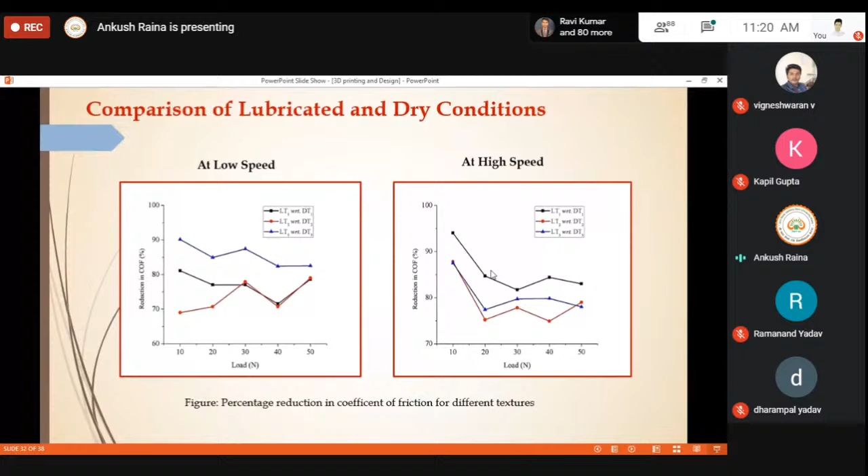Which certainly means that the lubrication and the oil retention capability of the texture T3 has resulted in reduced coefficient of friction. Similar kind of results are also obtained at the higher speeds. So under dry sliding conditions, the coefficient of friction was minimum for texture T2 at both high speeds and low speeds. But under lubricated conditions, at low speeds, T3 has the least coefficient of friction. The texture T3 has a bigger size and more lubrication capability, as has been discussed previously.

Whereas in case of high speeds, the coefficient of friction was minimum for the texture T1. This is due to the difficulty of trapping the lubricant. Again, the lubrication retention capability was less, which prevented effective lubrication for the large size textures. And the surface analysis carried out for dry testing showed that wear is mainly due to adhesion and abrasion. You can see the wear was mainly due to the plowing effect in all those SEM images shown to you. And the comparison carried out for dry and lubricated conditions revealed that lubrication conditions have a substantial effect on reducing the coefficient of friction in all these cases.

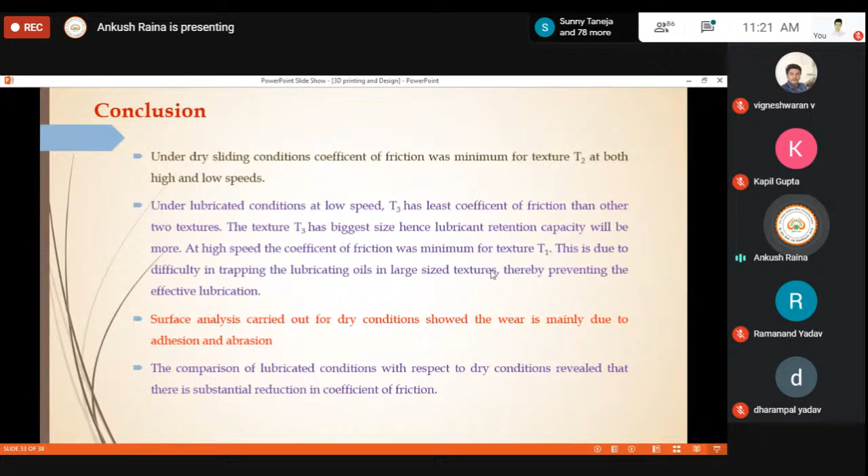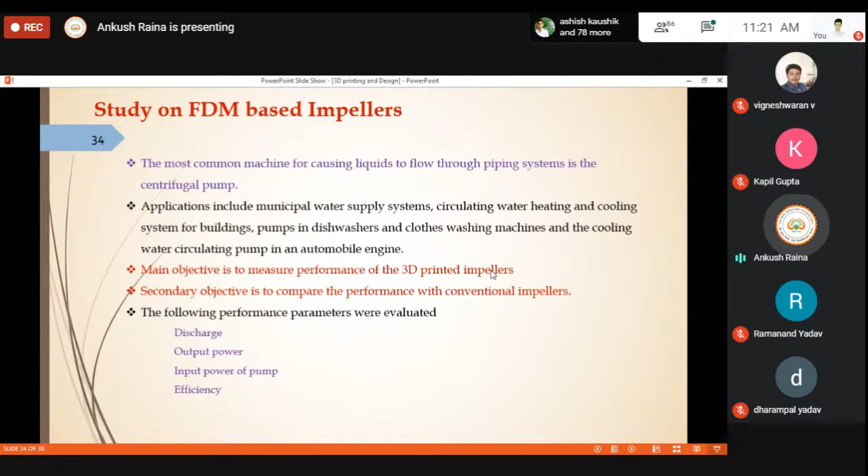So this study is still in process. I'll show you what we have done till now and what is still to be done. So we have obtained 3D printed impellers. We are trying to carry out the real-time testing for these 3D printed impellers. We have printed these impellers, and we will try to check the erosive wear characteristics. And in order to check the erosive wear characteristics, we will use different fluids.

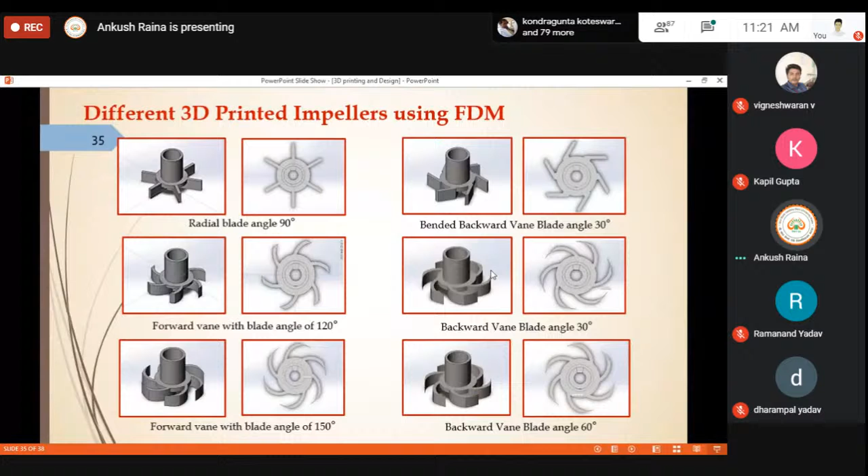So what we have done till now is we have obtained all these 3D printed impellers, and we have used the 3D printed impeller in a small pump, and we have carried out some testing with water itself, not with the different fluids. And we are in the process of carrying out the erosive wear testing of these 3D printed impellers, which have been printed with PLA.

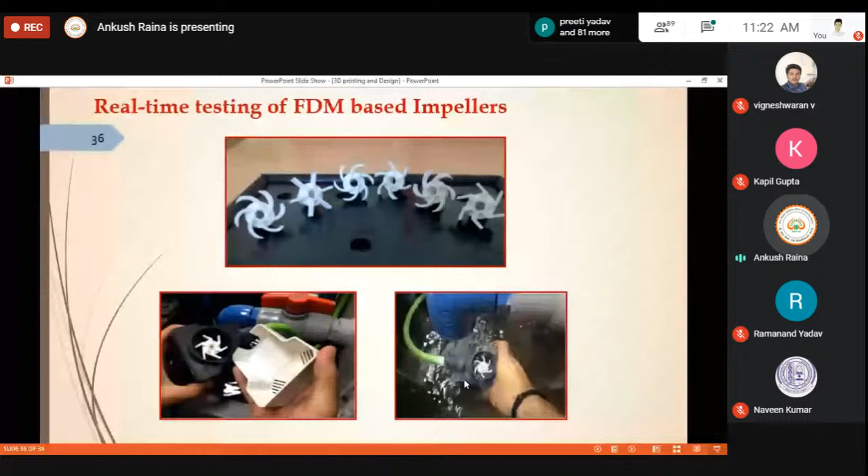So this is basically all about tribology and 3D printing applications, because wherever we are talking about material development, and 3D printing is a material development technique, there is always an area where you should take into consideration the moving and the sliding components. And if you're talking about moving and sliding components, then certainly tribology comes in. So 3D printing should also encompass the tribological applications and the tribological properties of the materials which are being developed for particular applications.